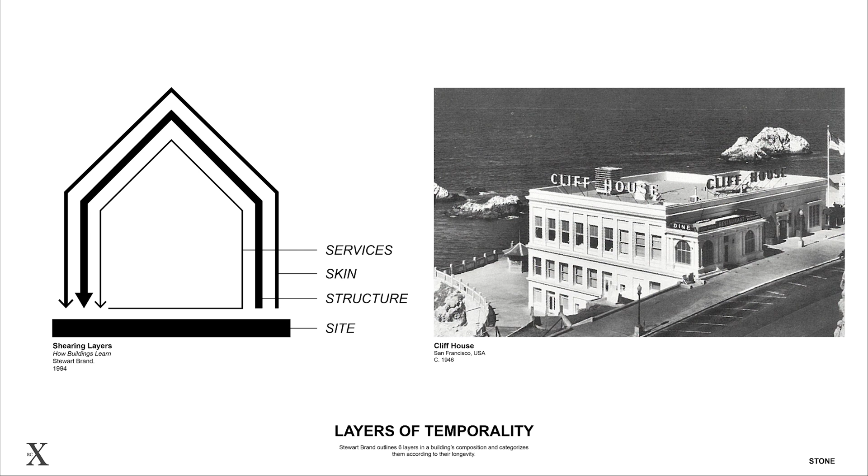As described by Stewart Brand's shearing layers, different layers in a building have different temporal qualities. Site stays for eternity, structure for 30 to 300 years, skin for 20, services for 7 to 15, space plan for 3 to 30, and the stuff that can move daily.

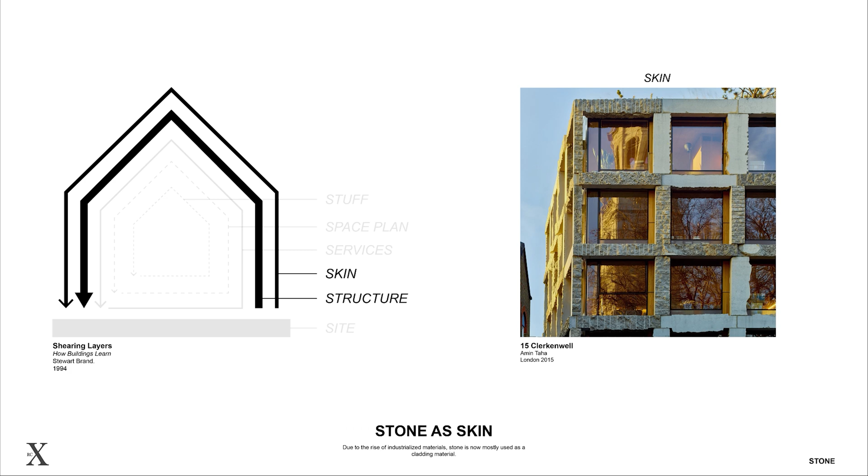We are interested in exploring how quarried stone can act as a structure and 3D printed stone can act as a skin for a building. We then explored qualities and limitations that stone has, like sourcing, its physical and chemical material characteristics, and its natural ability to promote non-human growth like algae and moss.

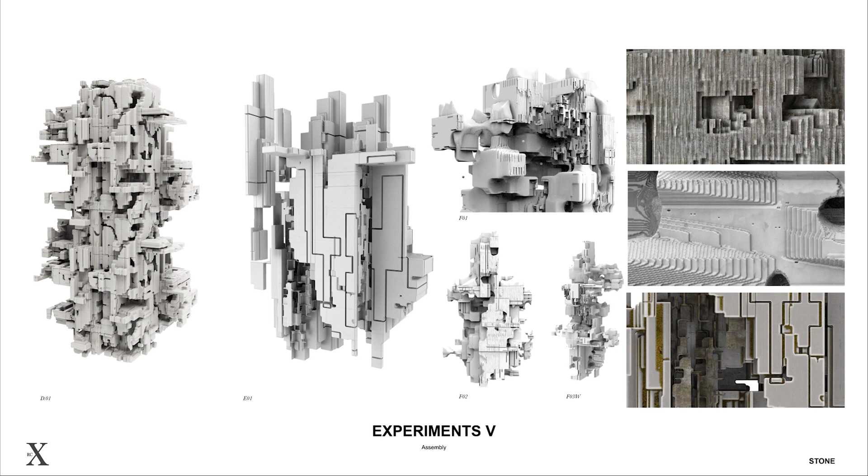These are some of our initial experiments where we tried to create bioreceptive spatial qualities, stone textures, and poche and pocketed spaces. We created design tools using machine learning to place a primary structure on site.

For this, we utilized Pix2Pix to teach the computer how to generate new structural layouts based on inputs with multiple layers of information, typically found in the design process, such as a hypothetical site and solar analysis, in conjunction with subjective inputs in the form of intuitive line-based sketches.

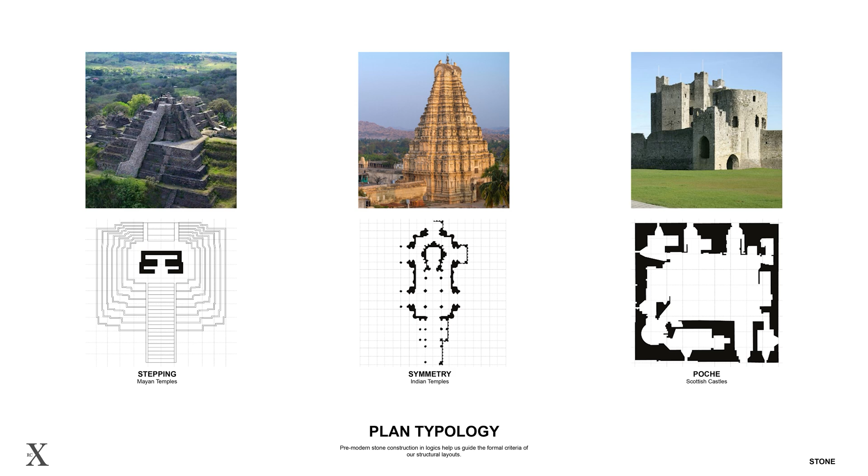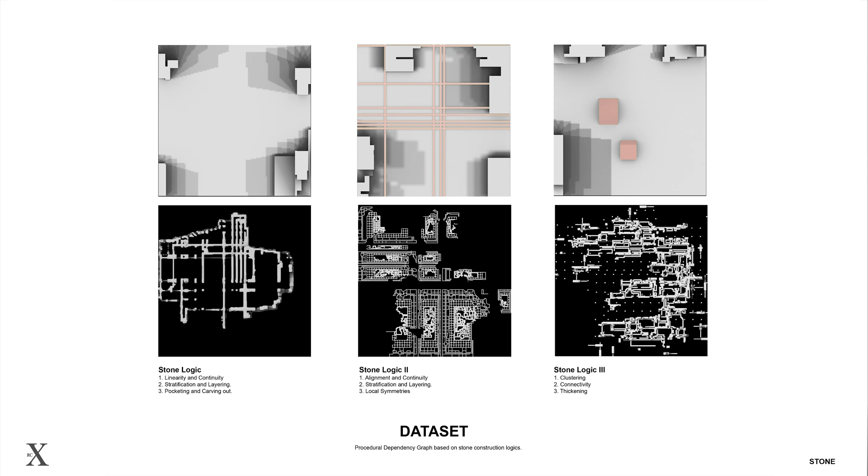We identified different characteristics in the structural layouts of ancient stone buildings that contribute to the structural stability, like stepping, symmetry, and poche. The initial data sets incorporating corresponding input and output generated layouts with different zones of density that indicated moments of structural and spatial redundancy while following the material logic.

Based on these results, we developed a design criteria to help us guide the direction of the datasets by incorporating 4 zones: a dark zone for tech, Goldilocks zone for human habitation, a buffer zone for incorporating human and non-human together, and a wilderness zone for non-human organisms.

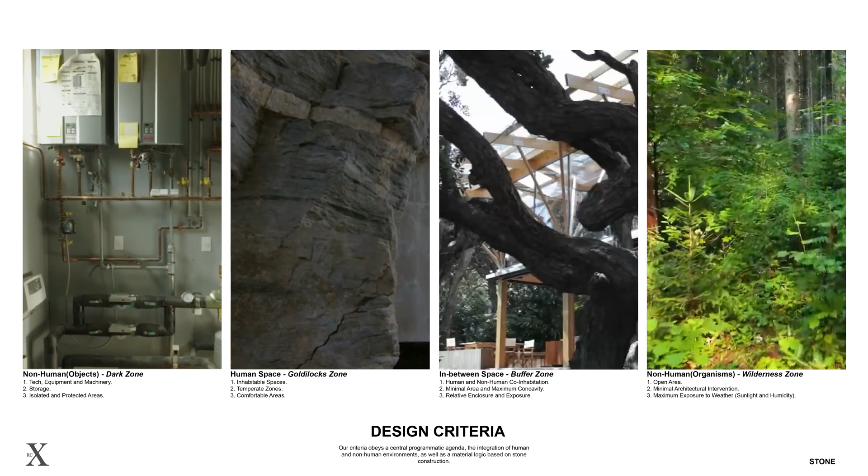For our computational logic 1, we ran a sun analysis that allowed us to visualize different degrees of solar gain throughout the site. The structural layout becomes a heterogeneous network of spaces that provide environmental conditions to suit human and non-human inhabitants.

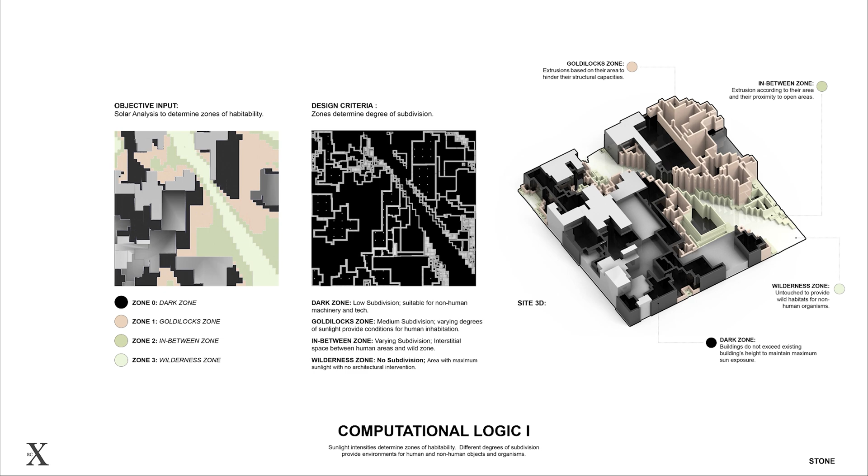For our second computational logic, the gestural sketch becomes the driver for the location of an open space in the wild zone. The criteria for subdivision gains complexity by taking into consideration both sun analysis and the proximity to open space defined by the subjective input.

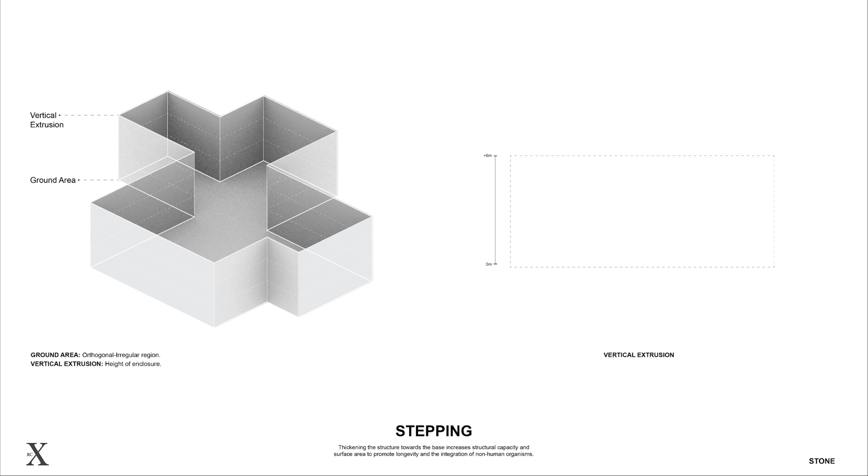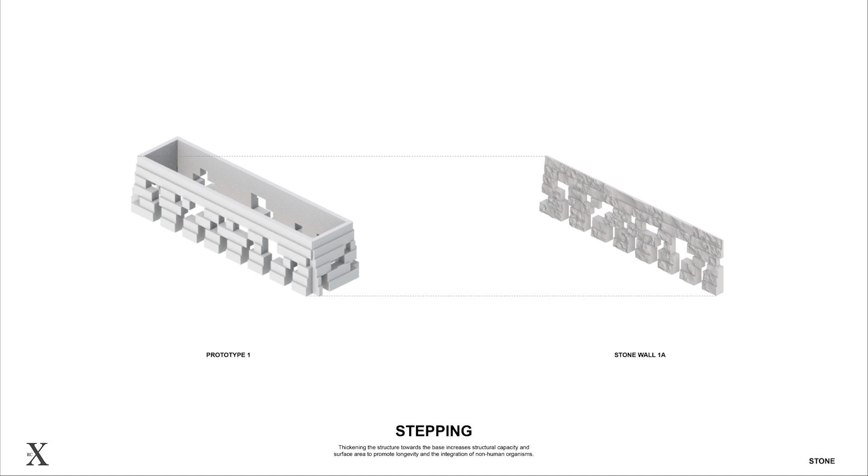Our three-dimensional translation of the dataset acquires a stepping condition that contributes to its structural stability and its surface articulation to promote the creation of new environments. Our third and most current computational logic utilizes the categories developed in the prior computational logics as well as the stepping condition.

The buildable area first gets subdivided into irregular orthogonal interlocking regions, and the region with the largest area becomes the open space. Then the borders between these regions thicken to allow for wilderness to spread through the site.

The edges are divided and selected on the basis of regions that need flexibility for future intervention and openness on site. By incorporating the developed stepping condition and the output depth map, we generate an informed three-dimensional primary structure.

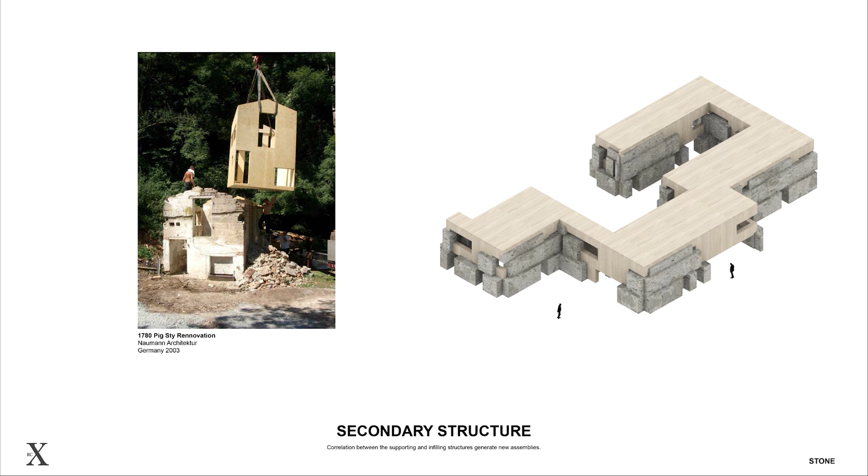We then started experimenting with an infilling secondary structure that also added to the variation that we were trying to achieve. The three-dimensional logic was developed by taking the stepping for extruding the primary structure and infilling a secondary structure that is guided by the gestural sketch and the corresponding height.

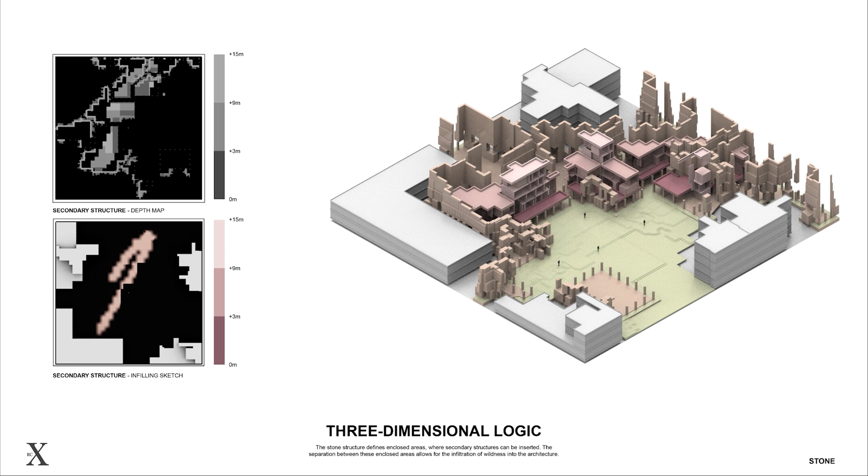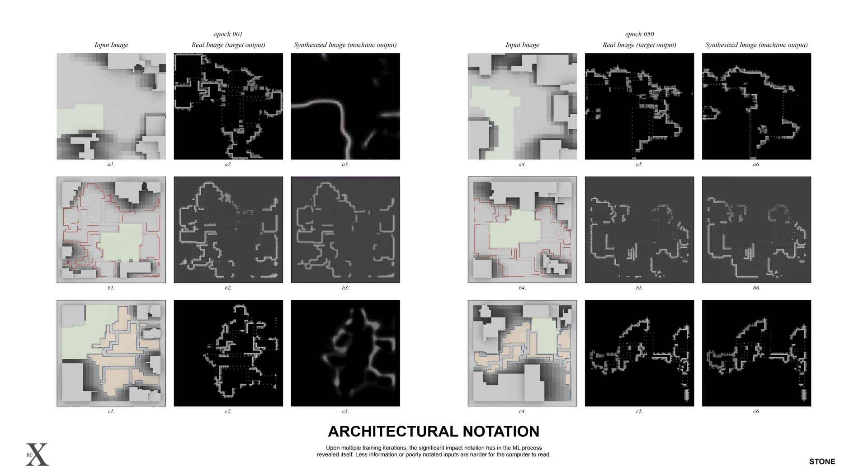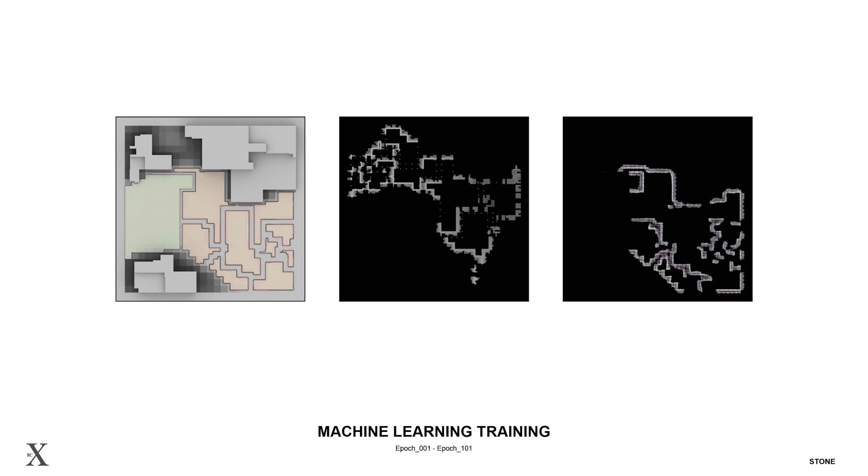In order to train the machine, we started experimenting with inputs. We realized that a detailed and color-coded input required less training to produce more accurate results than an input that was poorly notated. We then tried various permutations and combinations of inputs by keeping one layer constant and the rest of the layers changing.

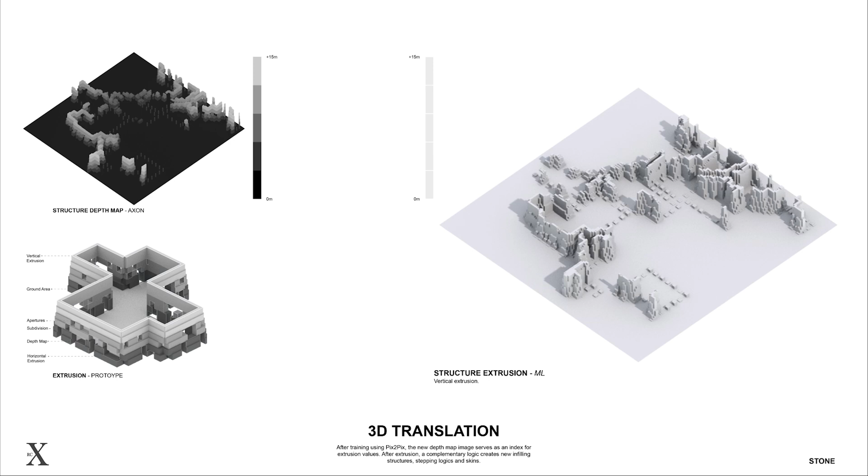After training using the Pix2Pix model, the new depth map image serves as an index for extrusion values. After the extrusion, a complementary logic creates new infilling structures, stepping logics, and skins.

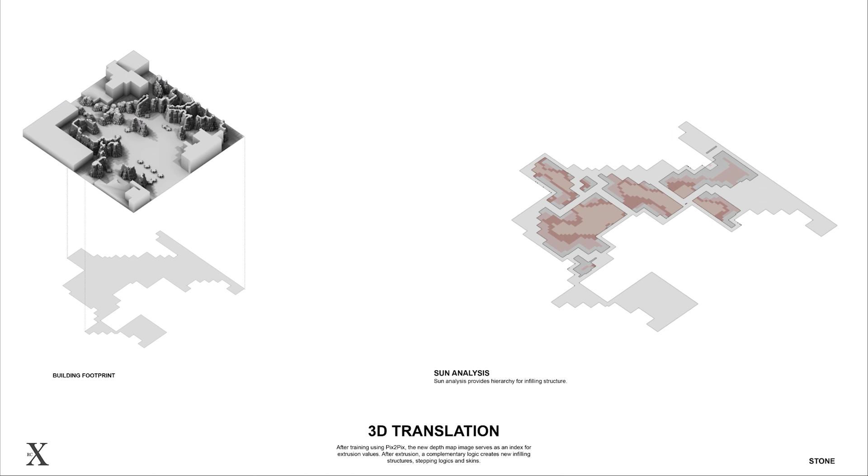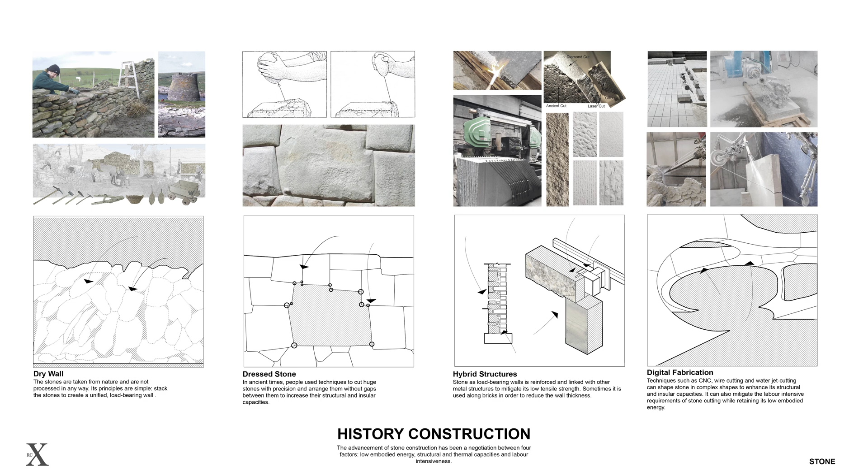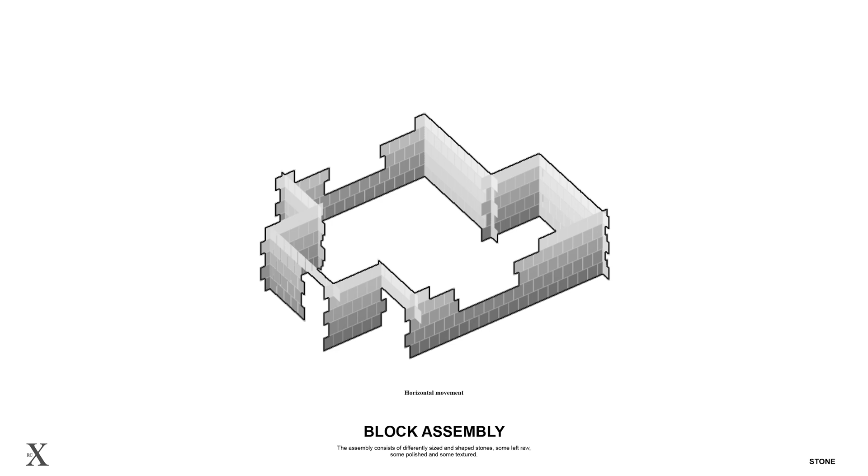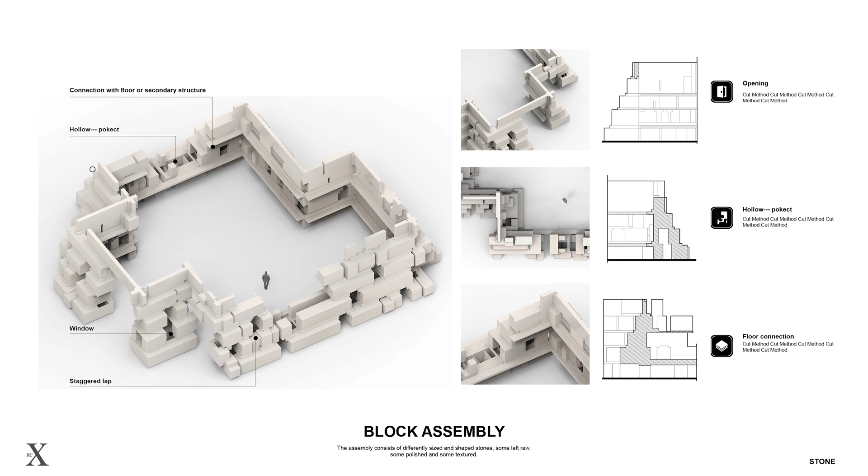By keeping the primary structure constant and the skin replaceable, we provide for multiple plan alternatives for the same building. For skin, we decided to use 3D printed stone as it can very intricately carve out detailed textures that will enhance the natural bioreceptivity of stone and is also easily recyclable.

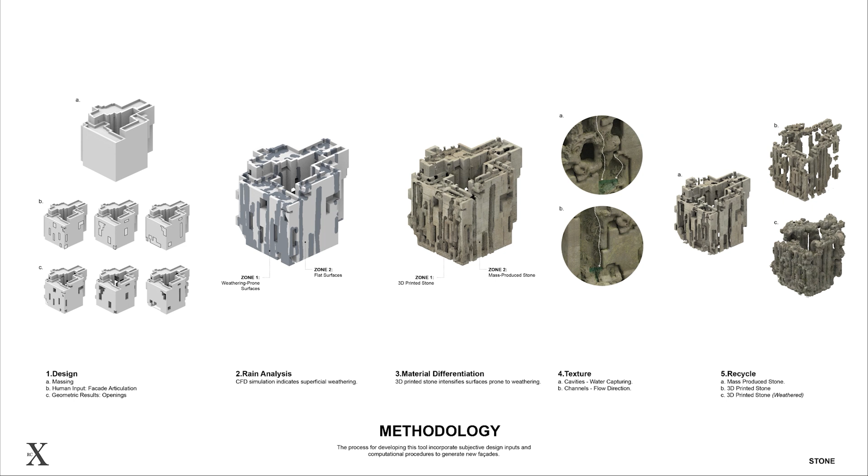We wanted to create a design tool that predicted weathering using rain analysis so that we could input the digitally printed stone where rain would create the most weathering according to our tool. This digitally printed stone has bioreceptive textures to enhance and sustain growth of non-humans. Once the 3D printed stone is weathered heavily, it can be easily replaced.

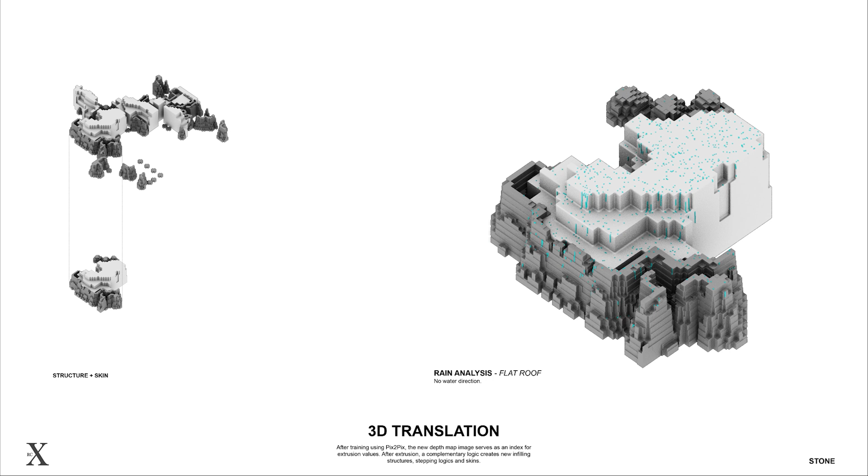To predict weathering on stone, we analyze the erosion process that the rain causes. We build two models, the flow model of rainwater and the process of water transportation within the walls due to capillary action. We then analyze different roof types and how they channelize rain.

Thus, after applying the skin, we start cutting it out to create spaces for water collection. We then experimented with textures. We wanted to create areas which have indirect sunlight, some amount of water retention, and wind buffer.

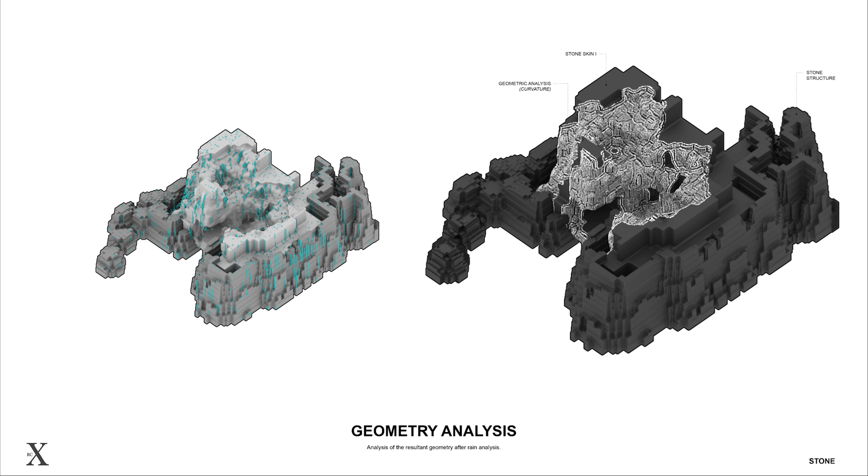At this step, we analyze the area separately for rain, light, height, and the curvature to get the texture that can guide the rainwater into pocketed spaces and reduce the direct sunlight where non-human inhabitation can happen.